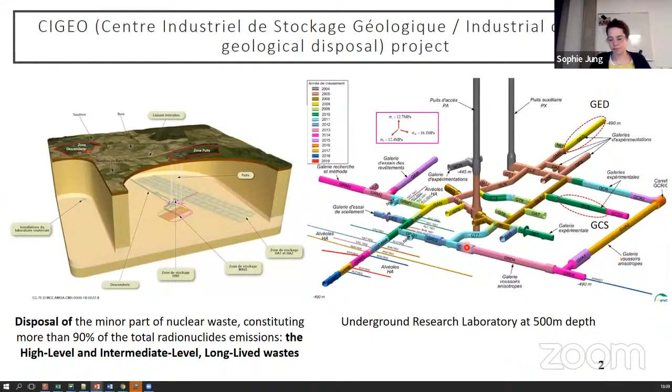excavated in perpendicular directions. So during the excavation of the drifts constituting the underground laboratory, two different types of fractured zones have been observed, depending on whether the drifts were excavated in the direction of the minor principal horizontal stress or in the direction of the major principal horizontal stress.

So many research teams have been working on modeling the convergence of those drifts, and their work has been published. Some of the work has been published in an article by Seyedi et al. in 2017. The graph is kind of busy, but I will try to make my point clear. The graph shows different numerical simulations, hence the lot of curves.

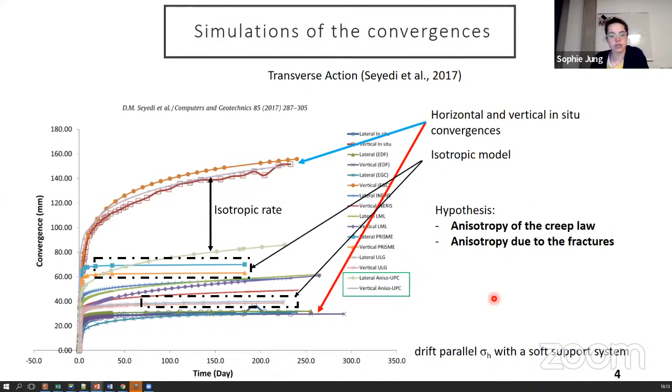So I will present you here quickly the outline of my presentation. What I'm going to present is a part of my PhD work, and I told you my two principal hypotheses. First I will present the first numerical simulation that I did of the convergences of GCS and GED drifts with a continuous equivalent model with numerical calibration of the anisotropy parameters.

Then we will try to link the anisotropy parameters to the behavior of the fracture, and so upgrade the numerical simulation. And finally, having linked the anisotropy parameters to the behavior of a fracture, we will be willing to measure those parameters on a fracture. So we also developed an experimental setup, especially designed to investigate the creep slip of a fracture.

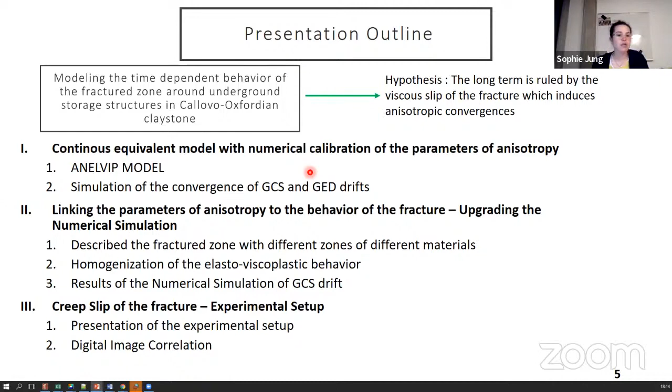So first, I'm going to present the model used in the numerical simulation. It's the model ANELVIP, which is already present in the FEM code DISROC, and it's a threefold anisotropic model. The elastic, plastic, and viscous parts of the constitutive law are transverse isotropic. The plastic and viscous anisotropy are managed by anisotropic stress scaling, as introduced, at the time only for plasticity, by Hill in 1948. The anisotropy is defined by two plastic parameters and two anisotropic creep parameters.

So basically for an isotropic material, the parameters Fn and Ft are equal to 1, and the figure represented here would be a circle. If you change the value of Fn, you describe a change in the behavior in the direction perpendicular to the reference direction. So here you have one reference direction, and by changing Fn, you change the behavior in that direction, and the circle becomes an ellipse. Ft describes the behavior in shear, so the ellipse becomes a kind of star, which can be minimum or maximum at 45 degrees.

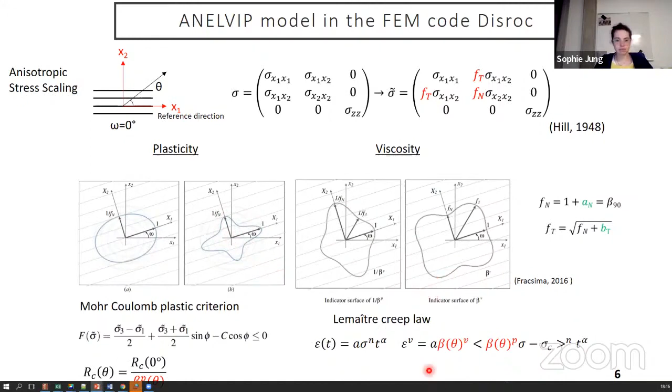Okay, so in our first model, we considered one unique material for the whole medium, without making any difference between the fractured zone in the vicinity of the drifts and the sound rock. Our objective was to reproduce both measured convergences of GED and GCS drifts with the same model. So the elastic, plastic, and viscous laws and parameters are the same for both drifts.

And the anisotropy in the model is assumed to be due to the fracture. So we assume that the direction of anisotropy is the same direction as the main fracture around the drift.

So basically for GCS drift, you have a vertical fracture, and hence transverse isotropy oriented in the vertical direction. And the anisotropy is rotated by 90 degrees for GED drift, as the fractures are oriented more in the horizontal direction.

The parameters of the plastic and viscous anisotropy are defined by numerical calibration by comparison to the in situ observation. So as you can see here, in bold, you have the result of the numerical simulation, and the other curves represent a measurement of in situ vertical and horizontal convergence. There are many curves because many sections of the drifts were measured.

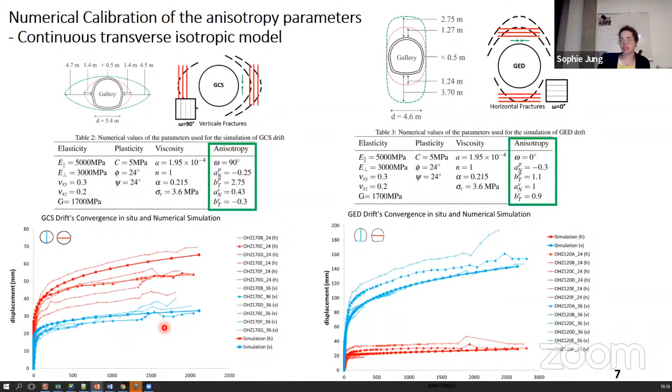And so the parameters of anisotropy are different between the two drifts, as the fracture density and orientation are not the same in both fractured zones. So while the convergences are well reproduced, the parameters of anisotropy are not clearly linked to the fractures yet. At least it's not easy to understand their physical or mechanical value. So since our idea is to consider that the observed anisotropic behavior is due to the fractures, we were wondering if we can properly link the behavior of the fractures to the parameters of anisotropy.

So now the idea is to formulate with homogenization technique the elasto-viscoplastic behavior of one representative elementary volume constituted by isotropic sound rock crossed by equidistant parallel fracture planes, and then describe the fracture zone by such REV. So you have here the case of GCS drift, and the REV is changed, the orientation and the fracture density is changed between the different zones. The whole medium is not modeled by one material anymore, but it's cut into different zones of different fracture density and orientation.

This division into different zones is done based on statistics data obtained from all the drifts excavated in the direction of the major principal horizontal stress. I will then refer to the simulation of these types of model as a simulation of GCS type drifts. So it's all the drifts which present a horizontal fracture zone.

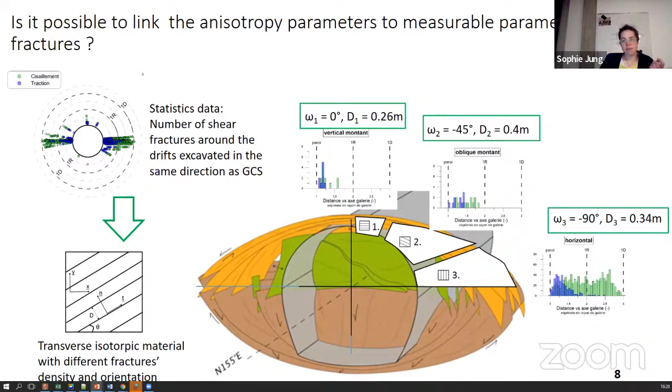Yes, so how does the REV behave? So for its elastic part, the behavior is of a classical stratified medium. Regarding the parameters of plastic anisotropy, they are calibrated on the variation of the uniaxial compressive stress with regard to the fracture's orientation. And the parameters of viscous anisotropy are calibrated by homogenization techniques used to express the macroscopic viscous strain tensor.

The strength or the success in this calculus is that now we have a good understanding of the parameters of anisotropy, as they are a function of fracture parameters that are completely understandable and that we can actually measure through mechanical tests. So for instance, regarding the elastic part, the parameters that need to be measured are the tangent and normal stiffness of the fracture and the fracture density. So the stiffness can be measured through normal compressive stress and direct shear tests.

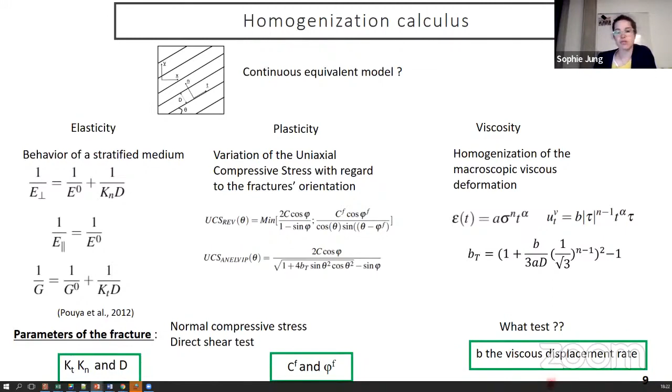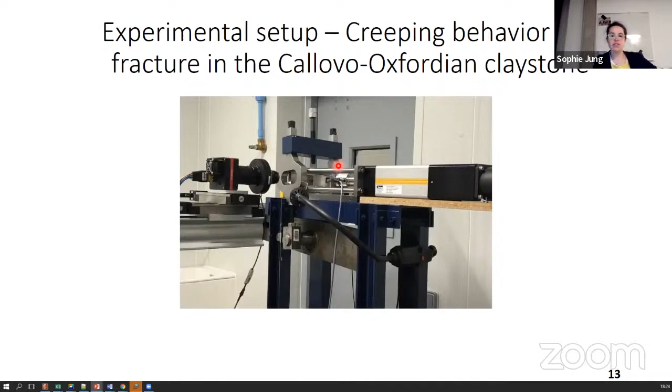So I'm going to present now the experimental setup, in order to study the creeping behavior of a fracture in the Callovo-Oxfordian claystone. So the experimental setup is designed to investigate the viscous behavior of a fracture in the COx claystone, which comes to studying the slip of the interface between 2 blocks of the rock under constant shear stress. The blocks of COx claystone are also kept under constant normal stress.

The experimental setup is composed of a cylinder controlled by a LabVIEW software that will dispense the shear force, and of an oedometric frame that you cannot see here, but that allows to apply a constant and stable in time stress normal to the fracture.

So 3 rectangular blocks are cut in a core of Cox claystone. The dimensions of the blocks are set on the diameter of the core provided by Andra. And from now on, I will refer to the 3 blocks as one sample. By shearing the central block between the 2 upper and lower blocks, which are blocked at their ends. So both blocks here are blocked there, and we push here.

That allows us to avoid having to manage a contact between the rock and the frame. That's why we are shearing 3 blocks and not 2 blocks. 2 LVDTs on each side of the sheared sample. So the middle one is the sheared sample. You can see it better here. 1 LVDT measures the movement of the piston, and 1 other LVDT is placed behind the block.

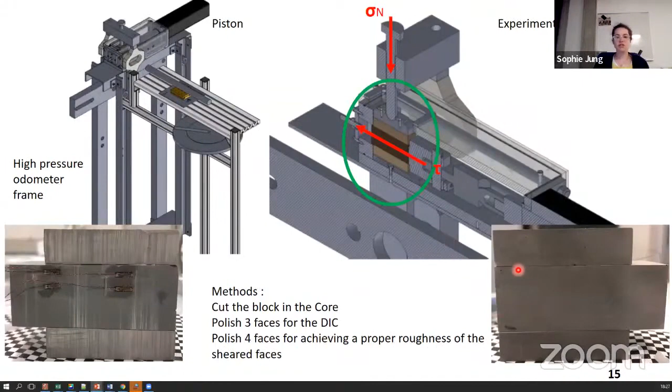Regarding the digital image correlation, we use a monochrome camera with a 150 million pixel sensor, which is quite a lot, to acquire the images. To obtain a maximum resolution of the whole sample, the camera is mounted on 2 motorized displacement stages that you can see here. 1 stage is used to move in the direction parallel to the sample here. We take each time 2 pictures of the sample, 1 of the left side and 1 of the right side, to increase the resolution of each picture.

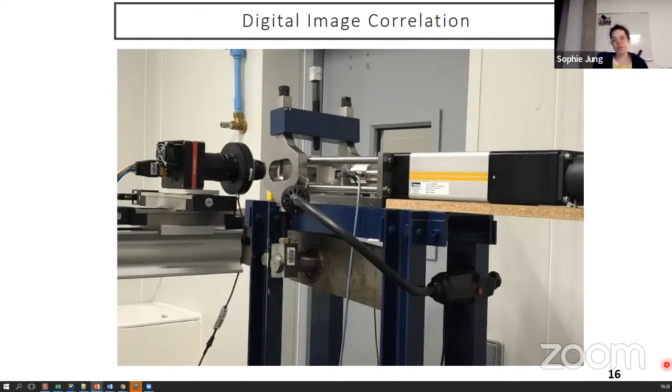The other stage is piloted to make a very precise focus. So it allows the camera to move backward and forward to the sample. The focus of the sample is optimized by studying the variance of gray levels normalized by its mean value, and all the process of focusing is completely automated. So along the experiment, the automatic focus is run before taking a picture, and a picture is taken every 10 minutes, actually every 5 minutes, because 2 pictures are being taken.

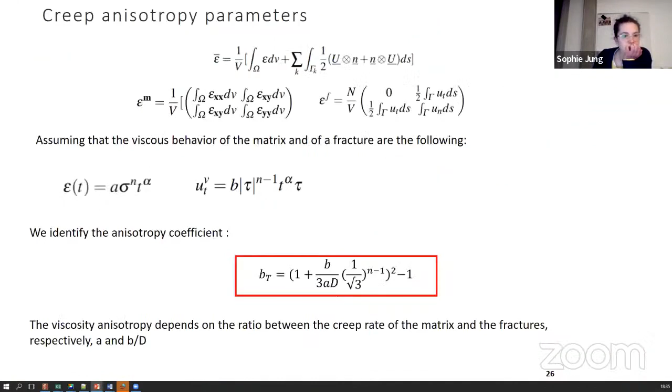And the creep rate for the same rock, you already have this value? Yes, I have classical creep tests made on Cox claystone provided by Andra, and I've already calibrated the parameters of my models on those tests. I have them here. Yes, these were creep tests provided by Andra, which I used to calibrate the parameters of the Lemaitre creep law. Okay, thank you.

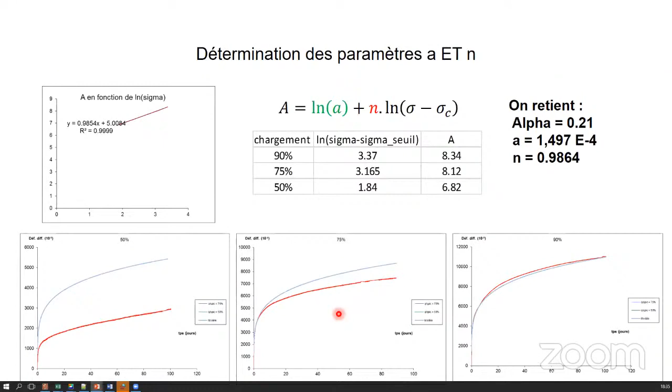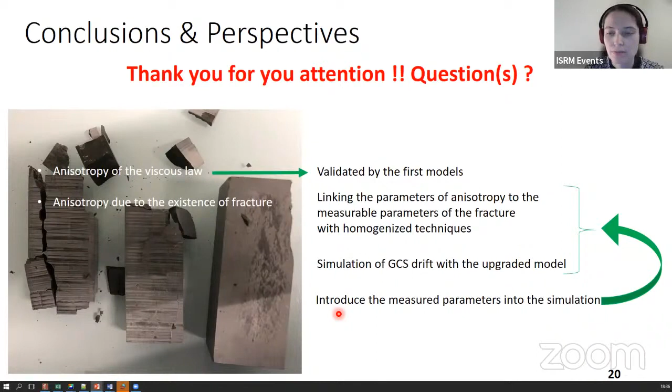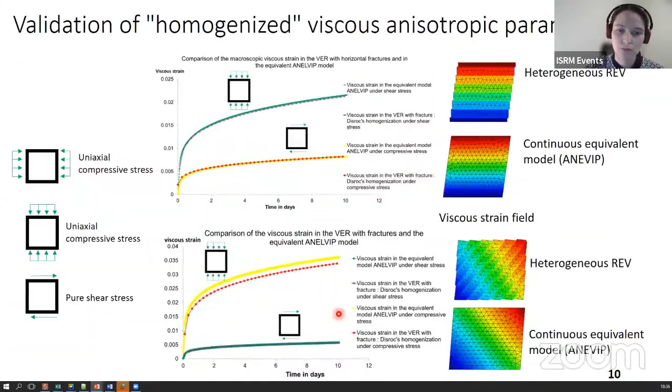We have a question in the chat. Two questions. First one, what are the in situ stresses? Is the depth fixed by the GOV or by geological conditions? Thanks. So for the in situ stress, the two drifts don't have the same in situ stress. For the drift oriented along the major principal horizontal stress, the state of stress in a cross section is almost isotropic, with 12.7 MPa vertical and 12.4 MPa horizontal. And the major horizontal stress is about 16 MPa. So in the cross section of the other drift, you will have 12.7 MPa and 16 MPa in the horizontal direction.

The other question was, is the depth fixed by the GOV or by the geological conditions? By the GOV is the government, I guess. Okay. So yes, it's the geological condition. They identified that Cox was a good host rock because of many different criteria, and the Cox is located at 500 meters depth.

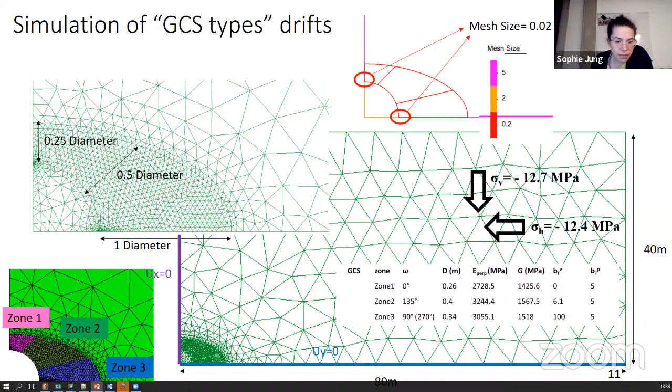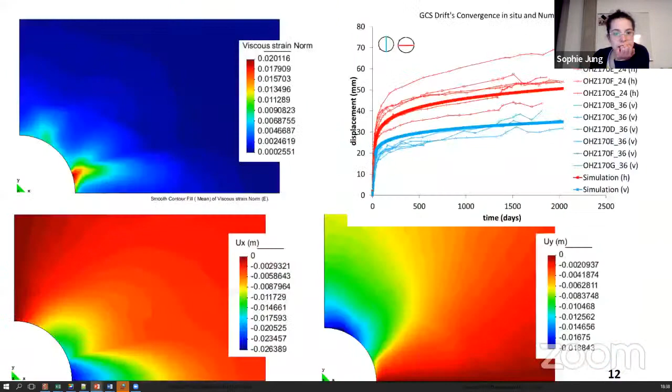Reduce the effect of matrix deformation by shortening the sample? Maybe. It's probably true. Well, I'm not sure. Maybe it should be tested. I mean, we see that the behavior is heterogeneous along the fracture, and the sample is already quite short compared to the actual shear fracture present around the drift. So we have to manage the difference between the scale of the sample and the scale of the fracture in situ, since we are willing to study the behavior of the in situ fractures.

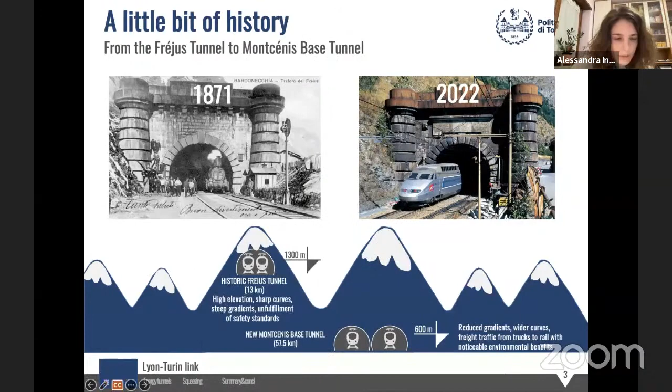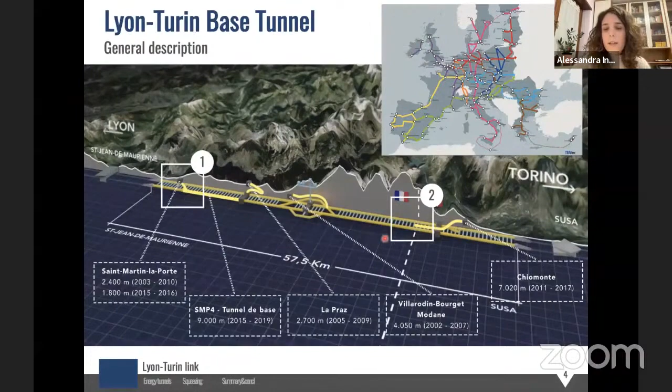You see in this picture the Trans-European Transport Network, and in green, the Mediterranean corridor, and I'm highlighting the Lyon-Turin link. The core of this link is, of course, this base tunnel. We see a picture here. During this presentation, we will focus on these two areas in the white squares. The first area is that of the Saint-Martin-la-Porte access and survey tunnel. The second area is at the border between France and Italy. So remember these two areas.

So let's start with the first challenge, the time-dependent behavior. As I said, we are focusing on this area.

So we have 4 access adits, 3 on the French side and 1 on the Italian side. And especially in Saint-Martin-la-Porte, an access tunnel called SMP2 has been built between 2003 and 2010. However, this access tunnel crossed a formation called Carboniferous Formation Front Houiller, which is also the reason why here the tunnel had to be reoriented. So severe squeezing was encountered with large metric convergences, ovalization of the section, and also failure of the preliminary support, of the temporary support.

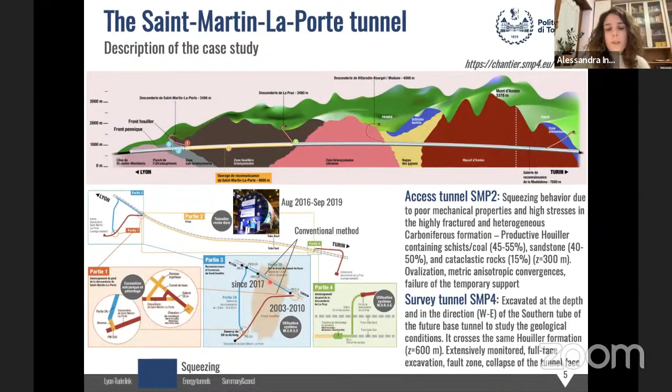Now, since 2017, another tunnel, a survey tunnel called SMP4, is being excavated, still with conventional method, along the direction of the future southern tube of the base tunnel, and that is crossing actually the same formation. So squeezing is expected. So how to deal with this behavior? Of course, there are in literature empirical and semi-empirical relationships that allow to evaluate whether we can have squeezing or not, and also the degree of squeezing. But then we have to really quantify it.

So in our laboratory, you see here some pictures. We have this special equipment, which is called high pressure triaxial apparatus, that allows to perform triaxial tests at very high confining pressure, up to 64 MPa. It is fully controlled with automatic acquisition of data and also local measurements of strains in the radial and axial direction. So you see on the right some pictures during the setup of the specimen. This actually is a specimen of clay shales coming from central Italy. We have just concluded an experimental campaign on such material.

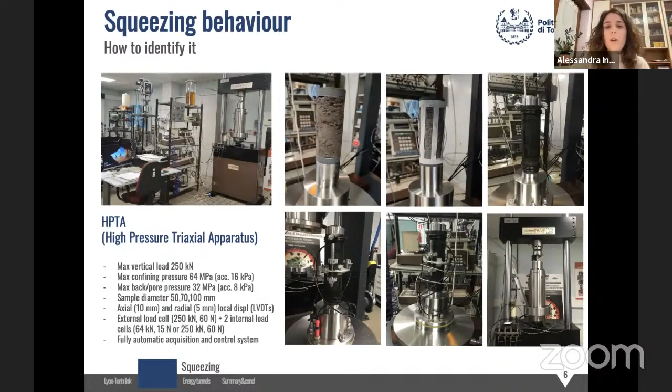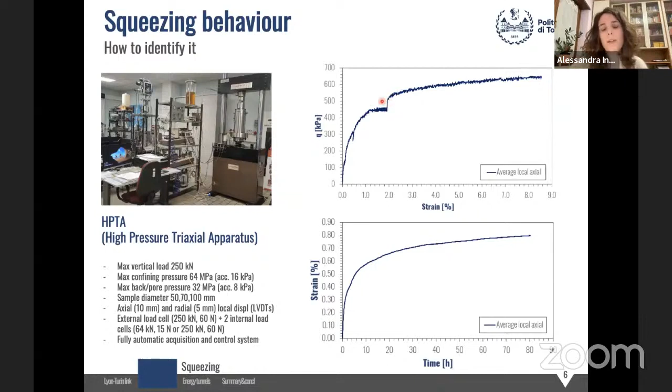And here you can see some examples of triaxial creep tests that we have performed. So the creep curve corresponding to this deviatoric stress can be seen below. And we can also appreciate the so-called apparent consolidation phenomenon. That is, after a creep phase, when we reload the sample, the stiffness of the sample is much higher, but then it goes back to the stiffness it had before the creep test.

Then another equipment is very simple actually, and we used it because the other one was not available. It's a mechanical frame, so very simple. We have a lower plate that is fixed and an upper plate that can move vertically thanks to a system of direct ways. And on this equipment, we performed an unconfined creep test that we'll see in a while, exactly on a sample of coal coming from SMP4 that I've described before.

So once we identify that we can have creep, then the objective is to perform numerical modeling, so to find time-dependent constitutive laws that allow to well reproduce displacements, deformations, and stresses. Sophie talked about a time-dependent constitutive law for fractures. Here we're seeing the SHELVIP model, which was formulated in 2009 by Debernardi. This is an elasto-viscoplastic constitutive model, which couples the classical theory of elastoplasticity with the overstress theory of Perzina for elasto-viscoplasticity. So the strain tensor is split into three components: elastic, plastic, and viscoplastic.

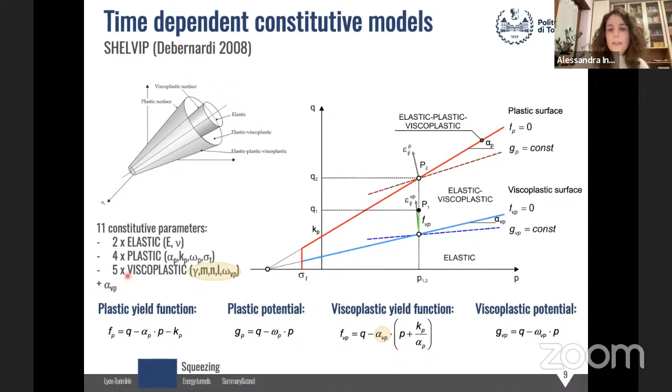11 parameters. So 2 are elastic, 4 are plastic, and these ones can be evaluated according to classic laboratory tests, for example, triaxial tests, and then 5 viscoplastic parameters. And then we have the state parameter alpha Vp that defines the slope of the viscoplastic surface, so the onset of viscoplastic strains. Now we will focus on the viscoplastic parameters.

This is important because then in the calibration procedure of these parameters, it's important to know their meaning. So gamma is the fluidity parameter, and it defines the amplitude of the viscoplastic strains. M is the shape factor, and it defines the shape of the creep curves. And we see here on the right that the value m equal to 1 is a kind of critical value, because if m is smaller than 1, then we can describe primary creep. If it is bigger than 1, the limit of the axial strain for time tending to infinite tends to infinite, so we can describe also secondary creep.

And another interesting thing is that in the plane axial strain rate versus time, we have a long-term asymptote whose slope is equal to the inverse of m. Then we have n, the load factor, that defines the dependency of epsilon Vp, the rate of the viscoplastic strain, on the deviatoric stresses, L, a time stretching factor that scales the curve with time, and viscoplastic dilatancy, which is the ratio of volumetric to deviatoric viscoplastic strains.

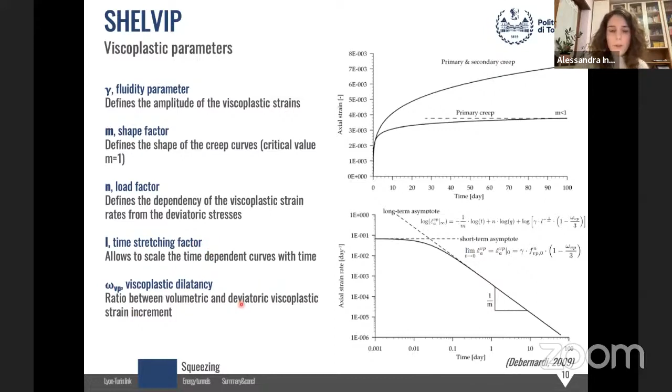So in terms of geometrical effects of these parameters, if we increase m, the slope of the curves of the axial strain rate against time decreases. If we increase gamma, the curves move upwards, while if we increase L, then the curves will stretch towards the left. So if we look not anymore at the plane of the axial strain rate, but of axial strain, then the role of M is to change the shape of this curve. We've said it's called shape factor. Gamma changes the amplitude of the strains, and L changes the time scale.

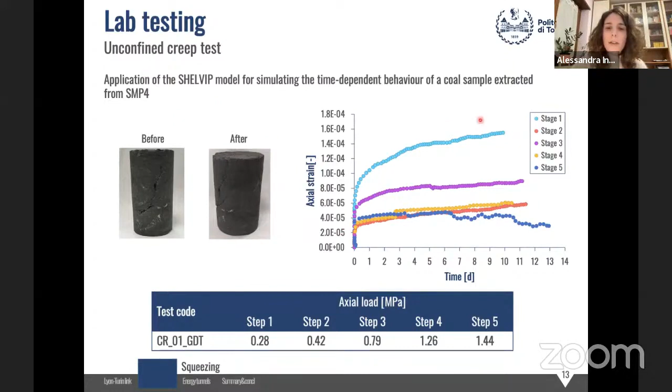So you remember we have talked before about the mechanical laboratory testing, and for example, the mechanical frame. So on that mechanical frame, we performed unconfined creep tests with 5 loading stages. And we considered the first stage to illustrate the calibration of the parameters. So to calibrate the parameters, we didn't start from nothing, but we had some parameters that had already been calibrated by Debernardi. So at the beginning we considered exactly the same parameters, but, now it's not very clear maybe, we obtained the uppermost curve, so this one.

So we had to change slightly the parameters to better fit the creep curve obtained from the laboratory tests. In particular, what we changed was gamma, M, and L, but as you see, we didn't change them much. By the way, we have to remember that it's not easy to say we changed a lot or little the parameters, because some expressions are to the power of m or to the power of n. Well, here n was kept the same, but m changed. So a little change in m might change a lot the other two, so gamma and L. However, we didn't change them much.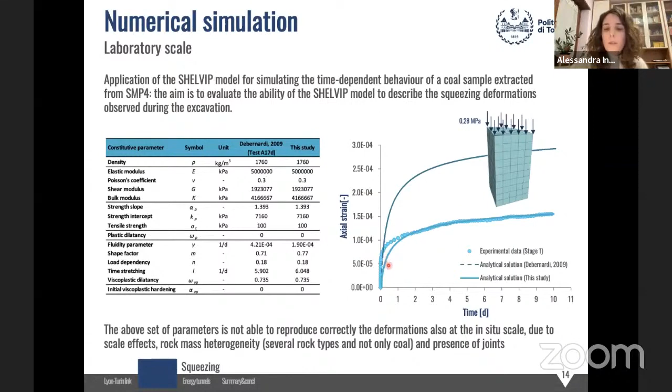But we have to say, before there was a question by Professor Aleana about scale effects. Well, here also we have scale effects. And so these parameters are not appropriate to simulate the in situ behavior. We'll see in a while what's the in situ case study that we have considered. This is due to heterogeneity of the rock mass, to the presence of joints, fractures, and of course to scale effects. So we move to the in situ scale, and the case study that we considered is the case study described by Yi-Chun Liu in his PhD thesis.

So we are focusing on chainages between 10,310 and 10,410 in SMP4. So here basically, till here, full face excavation was adopted. Then at a certain point, there was a collapse of the face, and then also steel ribs were later destroyed, due to the presence of a fault. So excavation continued with excavation of a smaller tunnel, which is called PS, and then enlargement of this section to the so-called section RPS. So you see, here it reaches just 10,300, but here also we enter the Houiller formation, so squeezing is expected.

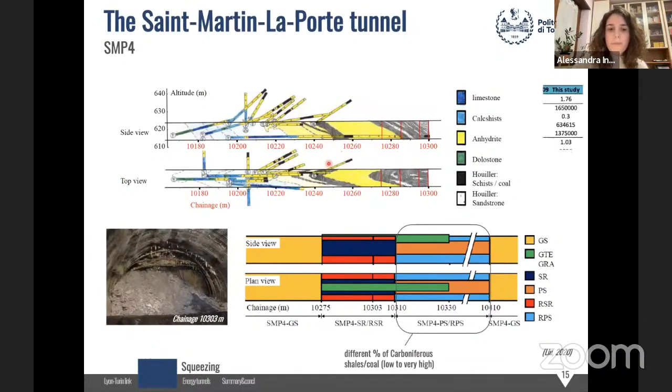So we performed a 3D model using FLAC3D. I didn't say before, we implemented the SHELVIP in FLAC3D, and we validated it against the triaxial test, creep test, and relaxation test.

So we built this model, which is asymmetric, where the in situ stress is isotropic, it's 16.2 megapascal. And we reproduced the different stages of excavation of the PS and RPS tunnels. So you see below the stages. So first we have the excavation of PS, and we followed the stages followed in situ.

So with a rate of 0.6 meters per day, then 12 meters behind the face, the installation of the support, which is made by shotcrete and by the so-called HDC elements, so high deformable concrete elements. And then after that, the excavation of RPS and 5 meters or 30 meters behind, depending on the chainage, the installation again of the same support.

So as I said, the set of parameters found at the laboratory scale was not appropriate. So we had to change some parameters, and in particular, we kept constant N and omega VP because we believe that given the fact that N is related to the deviatoric stress and omega VP is the ratio of volumetric to deviatoric plastic strain, they can stay the same, but the shape factor, the time scale, and the fluidity parameter are parameters that may change in situ. So we had to recalibrate them.

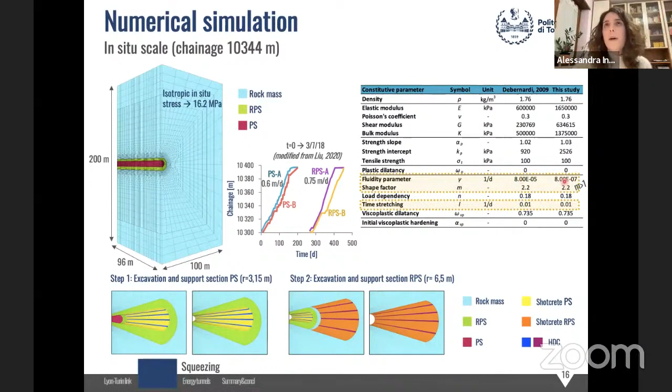So it's smaller. This can be justified because his case study simulated SMP2, and there the squeezing phenomenon reached convergences of also 2 meters, while in our case we are at about 30 centimeters, so it's reasonable that this parameter is lower. So I have to say that this is still an ongoing work. We haven't found the perfect set of parameters that perfectly matches the behavior in situ.

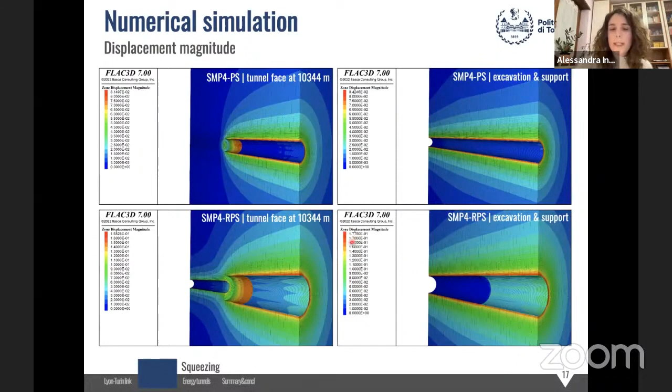Now I'll show you. So here we have some screenshots taken when the face is exactly in the middle of our model. So we are focusing the attention on chainage 10,344. Then when we complete the excavation and support of the PS tunnel, then when the face reaches the same chainage for the RPS, and then when the excavation is completed here. So we see that the maximum displacement obtained is about 17, 18 centimeters.

Of course, these sections are extensively monitored, so we have the convergence data. So we see here the results of the monitoring. So the convergences in the direction highlighted here in the picture, and with the parameters that we have shown, the continuous curves are the ones obtained. So we are still underestimating a bit the convergences.

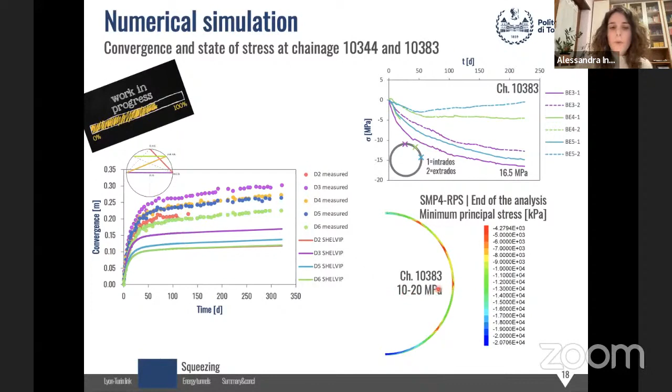Still, from the stress point of view, so here on top you see a picture of the stresses in these points measured in the shotcrete. So they reach up to 16.5 megapascal. We are in another chainage actually. And in the model, we are between 10 and 20 megapascal. So from the stress point of view, it works a bit better, but it's still ongoing work. So this was the first part.

Then the second part, we said we focused on energy tunnels. So in this picture, we see the geothermal profile. So these triangles represent the temperature profile in that area that I highlighted at the beginning, at the border between Italy and France. We see that the temperatures reached are quite high, so they are about 47 degrees. This is the tunnel elevation, and this is the profile of the Ambin Massif. So the tunnel is 2,000 meters deep.

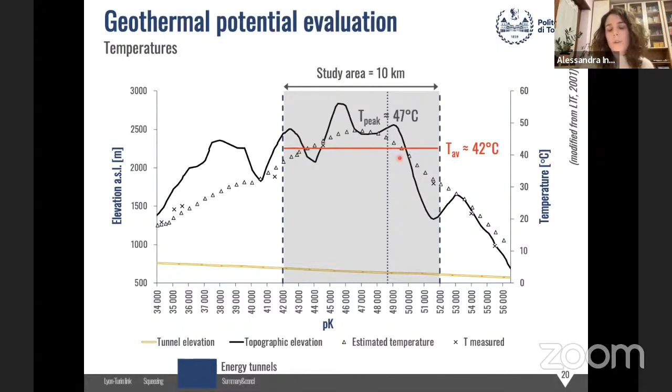So we said, why don't we exploit this geothermal potential to extract thermal energy? So we focus the study on an area with a length of 10 kilometers. So we consider the average temperature in this area, which is also the area with the highest temperature, equal to 42 degrees. So the idea is to thermally activate the lining by using a net of pipes with a twofold aim. So the first aim is to cool the tunnel, because the requirement is to have a temperature lower than 32 degrees. On the other side, we could also profit from this energy that is extracted to fulfill energy needs in the area.

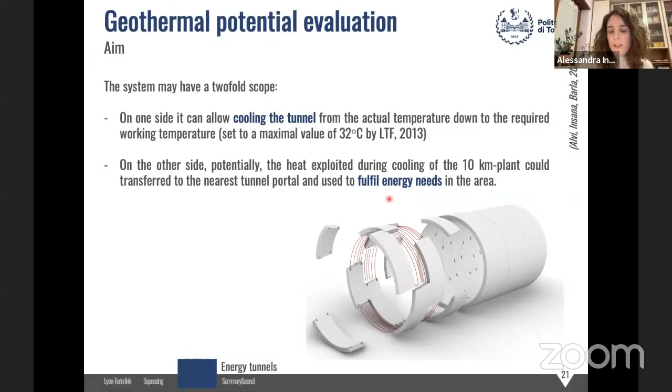So to evaluate the geothermal potential, we built a 3D coupled numerical model, so both thermal and hydraulic. So if we zoom on the tunnel, we simulated the tunnel with its dimensions, so a diameter of 9 meters. And we also simulated the air inside the tunnel explicitly with a finite element mesh, because we want to see the interaction between this technology and how the temperature changes inside the tunnel.

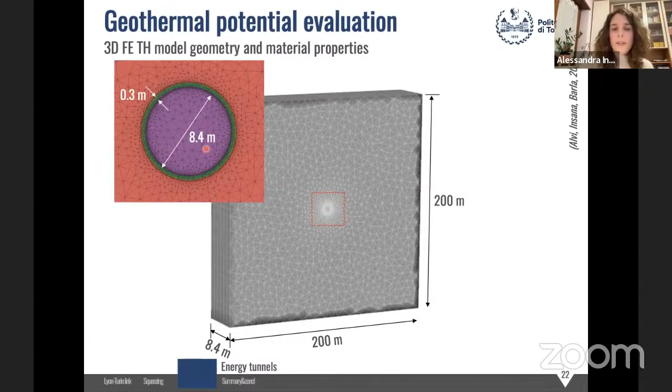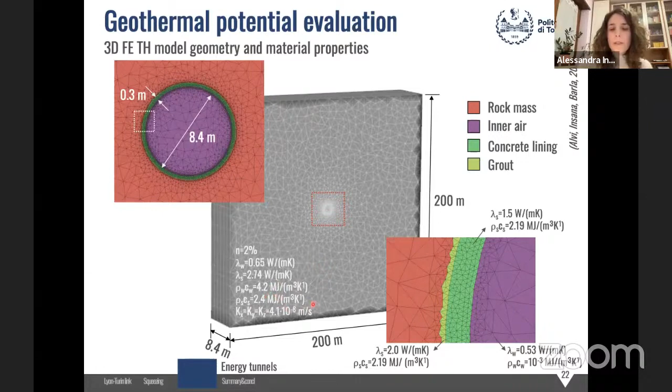So we defined the material properties, both thermal and hydraulic, in terms of thermal conductivity of the solid and fluid phase, the volumetric heat capacity, and hydraulic conductivity of the rock mass and of all the different materials.

So as said, the boundary conditions in terms of temperature are equal to 42 degrees. We don't have a groundwater flow, but we have fractures that are saturated, so we impose a constant hydraulic head of 1,000 meters. And to take into account the movement of the trains inside the tunnel, we consider an airflow of 8 meters per second and a heat source of 12 watt. The velocity imposed at the inlet and outlet of the pipes is 0.8 meters per second, and the inlet temperature is set to 24 degrees.

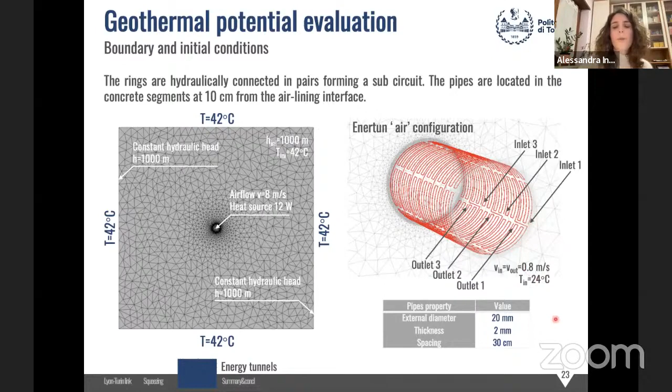So these were 4 theoretical scenarios, but the ideal operating mode depends on the aim. If we want to provide thermal energy continuously, then we have to opt for the continuous mode. But if we want to ventilate the tunnel, then we could opt for the monthly activation. In any case, the use of the energy lining has to be tuned to the aim, and we can have on and off cycles that are designed ad hoc depending on the aim.

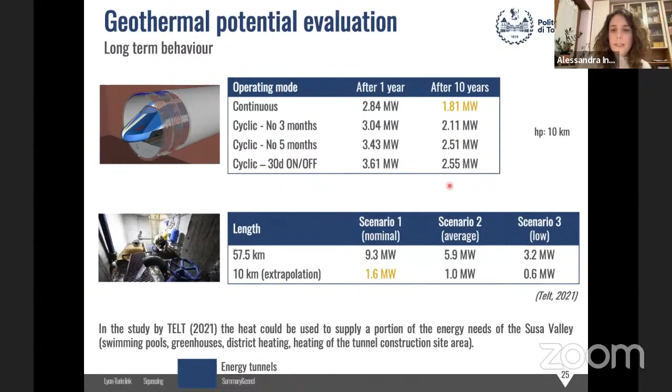Here we see the results of our study at the top, and the results from a study by TELT in 2021, where they evaluated the thermal power obtained by thermally using the water drained during the excavation and bringing it to the portal, to supply energy to the Susa Valley on the Italian side, for swimming pools, greenhouses, district heating. The results that we obtained, in the worst case, are very similar in order of magnitude to theirs, and in some cases more favorable. So it's a viable and interesting alternative.

So to conclude, when using time-dependent constitutive models, the calibration of constitutive parameters is not an easy task, and it's quite time-consuming. We have to do that both at the laboratory scale and, most often, also at the in situ scale. For the future, an idea could be to try to relate these constitutive parameters to the proportion of coal or carboniferous shales, so that we could enhance the predictive capability of the constitutive model.

About the second topic, we have seen that the energy linings can be an interesting alternative, also because we have advantages, for example, in terms of ventilation of the tunnel. So that's all.

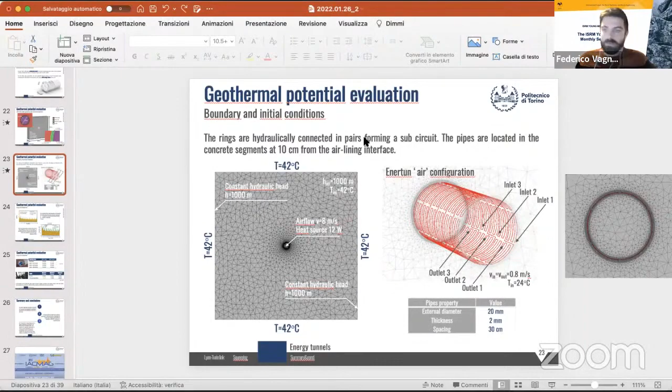Okay, thank you very much, Alessandra. I just share the screen and go to the end of this first ISRM Young Members Seminar. On behalf of the organizing committee, I'd like to thank the ISRM for helping us in the organization of this event. I would also like to thank Sophie and Alessandra for their very interesting and valuable presentations that address two relevant topics of rock mechanics. And we hope that this seminar provides you new insights and new challenges for research, and it could be a periodic event for sharing ideas about rock mechanics and related topics.

And for this reason, we want to invite you for the next seminar that will be virtually hosted by Asia on February 23rd. Dr. Sho Ogata, assistant professor from Osaka University in Japan, and Dr. Seo Park, senior researcher at the Deep Subsurface Research Center, Geological Environment Division of the Korea Institute of Geoscience and Mineral Resources of South Korea, will present their works respectively on development of a coupled thermal, hydraulic, mechanical, chemical model for predicting rock permeability changes, and comprehensive in situ stress estimation for a fractured geothermal reservoir for drilling, hydraulic stimulation, and induced seismicity. Further information will be available on the ISRM newsletter and website.